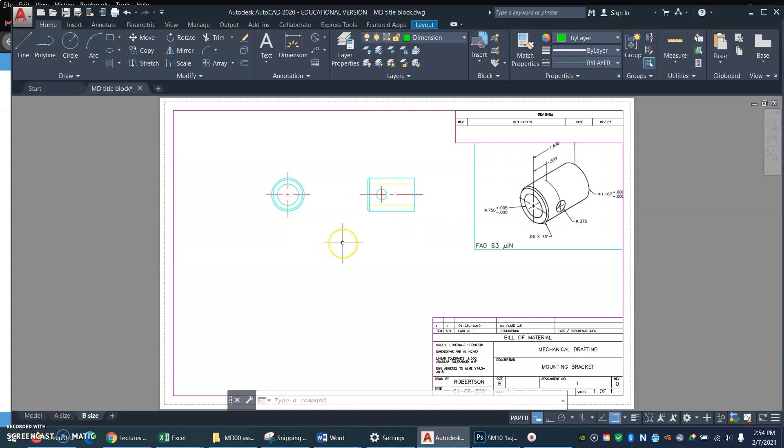This is a small part, as we mentioned, so let us try. Let me open the viewport. Right now it's at 1:1. Let us try a scale of 2:1 and see what happens. 2:1, and I'll pan. That does fit better, doesn't it? That looks pretty good.

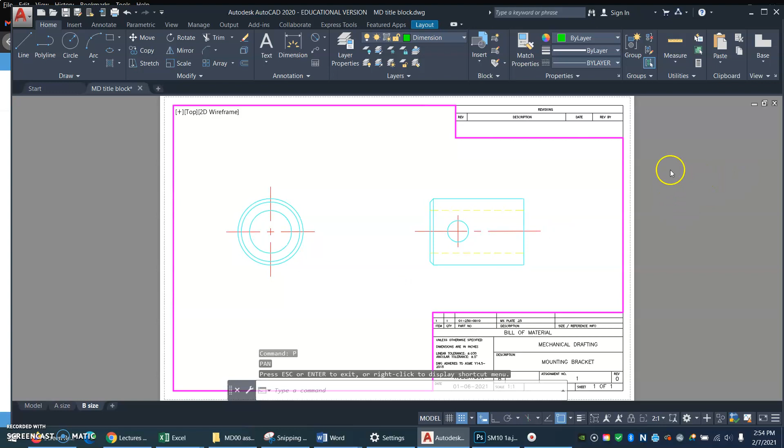The very next thing I'll do is double-click to close my viewport. Okay, my viewport scale is 2:1. That means my drawing scale factor needs to be 1/2.

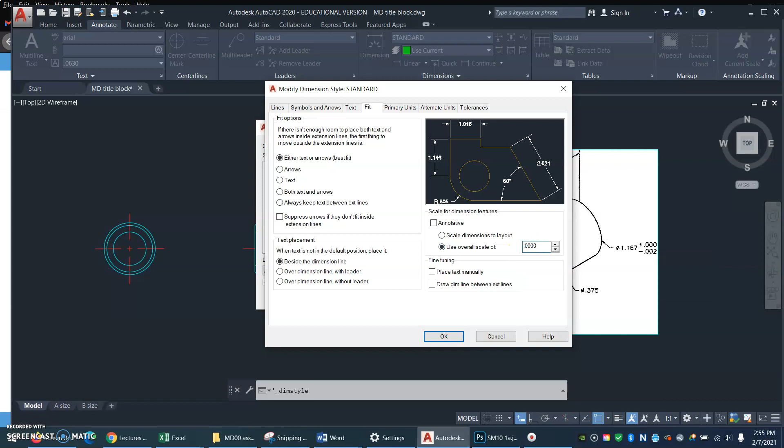So I'll go to the Annotate tab, Dimension Style, and I'll modify. I'll go to Fit, and under Scale, instead of a scale of 1, I'll have a scale of 1/2. Weird, huh? All right, so now,

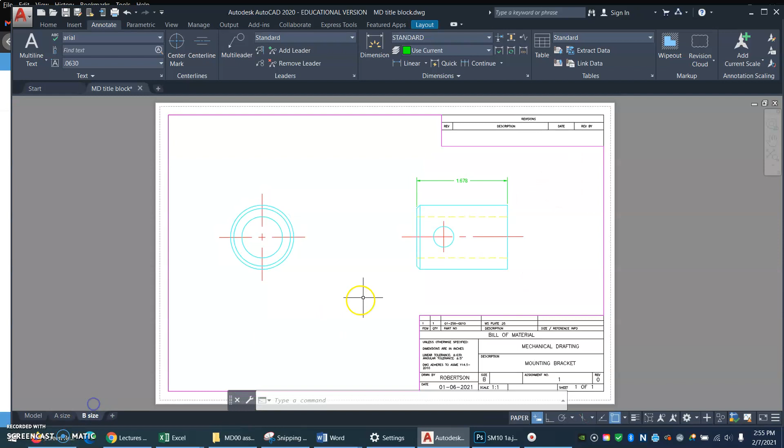Now my dimension should be okay. It looks tiny, but when I go to my 2:1 scale in paper space, it'll be just the right size. All right, so on and so forth, and I have another dimension here, don't I? Notice how I'm not clicking out in space, I'm clicking on the corner of the part that I'm interested in.

Okay, now I'm going to set a new dimension style for that 750 dimension plus 5 minus nothing. So I'm going to go to the dimension style, and I need a new style. I need to keep my standard, but I'm going to set a new style.

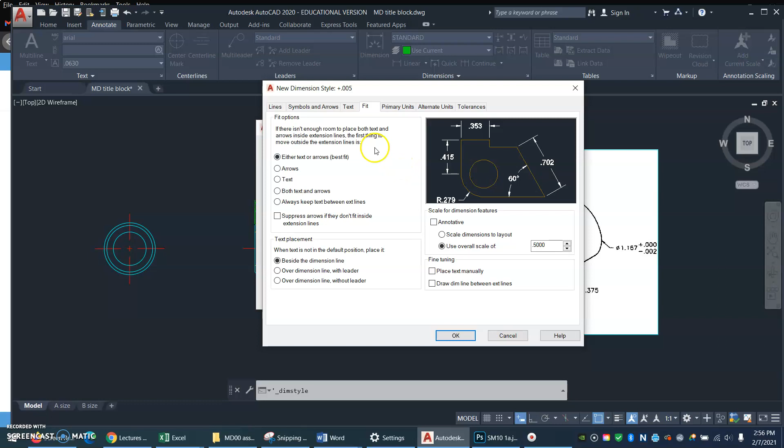I'm going to name this plus 005. I probably can't use special characters. Let's see if it allows it. Oh, it did. Okay. And now I'm going to go to the Tolerances tab.

And what method do I want? I want deviation. Watch the preview window change when I select it. See, now it's got deviation stuff. And for the upper value, I want 5 thousandths. I don't need to worry about those trailing zeros.

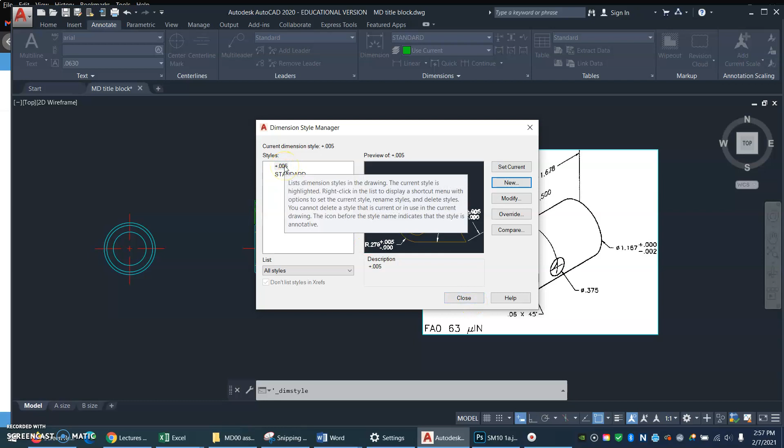It'll ignore them. So my upper value is 5 thousandths. My lower value is 0. And very important, I come down to the zero suppression area and I check leading. So suppress the leading 0. Okay. And I want to make sure that's my current style so I can put a dimension on.

Now, that is the tolerance on the inside diameter. I cannot put that in this view with the hidden lines, can I? Not allowed to dimension to hidden lines. So I'm going to put it in this circular view.

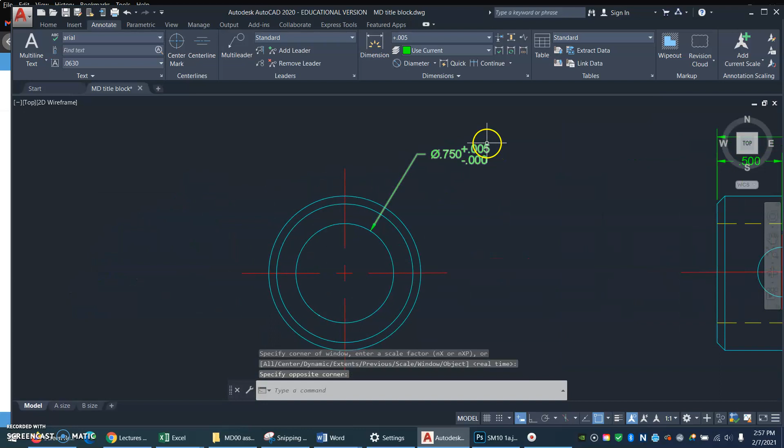I'll go get a diameter dimension, and I'll click on that inside thing, and looky there. There's my tolerance automatically put in, just like I want it.

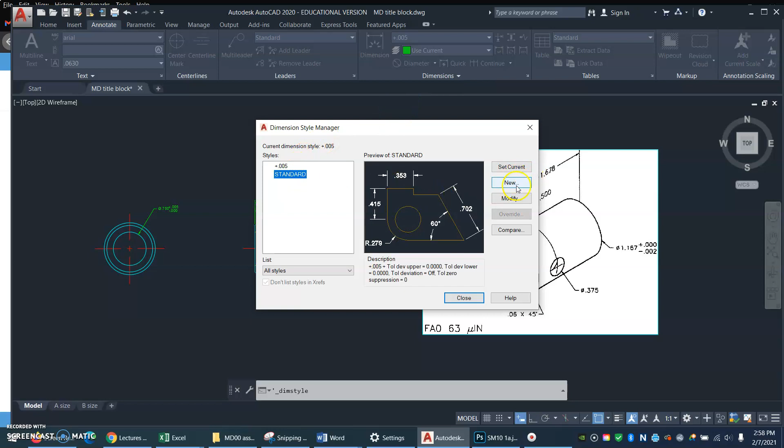Now I'll make another style for this outside diameter. It's plus nothing minus 2. Okay, so I'll start with one of the styles, it doesn't matter which one, and I'll make a new. I'm going to click new, and I'll call this minus 0.002.

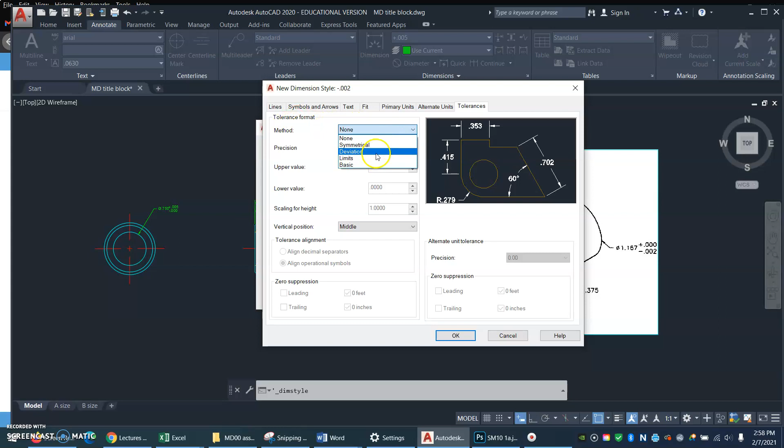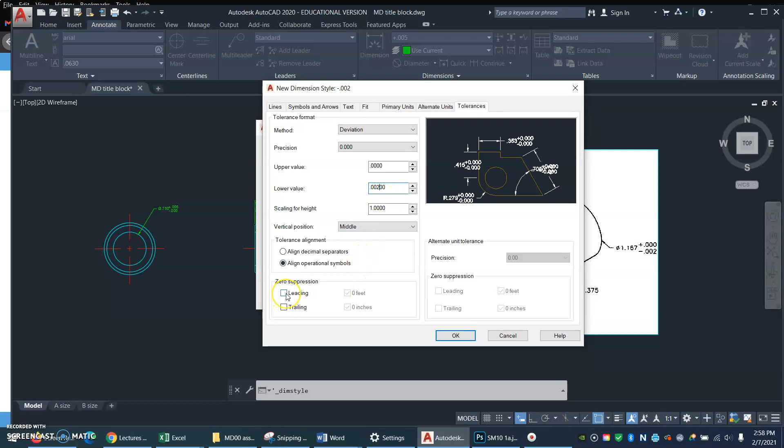Continue. And in the Tolerances tab, again, for the method, I will select Deviation. I'll leave the precision at 3 places. And this is plus nothing minus 2. So plus a bunch of zeros minus 002. And I want to make sure that I check Suppress Leading 0. OK. And that's my current style now.

Close. Now I'll put a dimension on this outside diameter. Oh yay! So look at this. I have 3 different styles. One is standard for these more plain looking ones. Here's the plus 5 and here's the minus 2. They're all different. Goody goody.

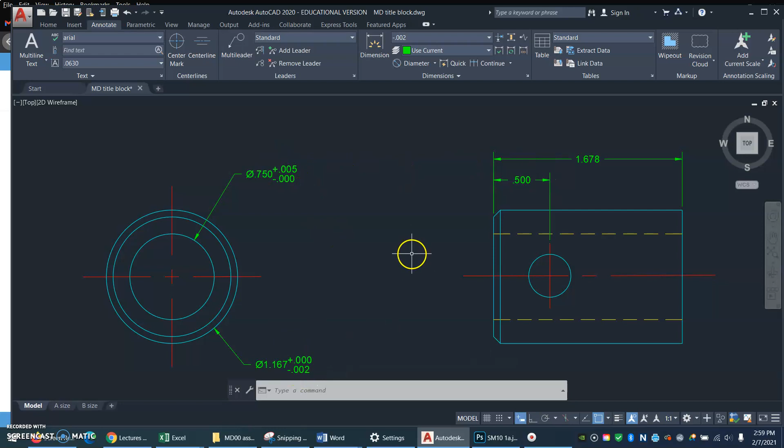What else do we want to do? Let us go to paper space. I'm not done yet. I need to do, okay, fine. I need to do 2 other things.

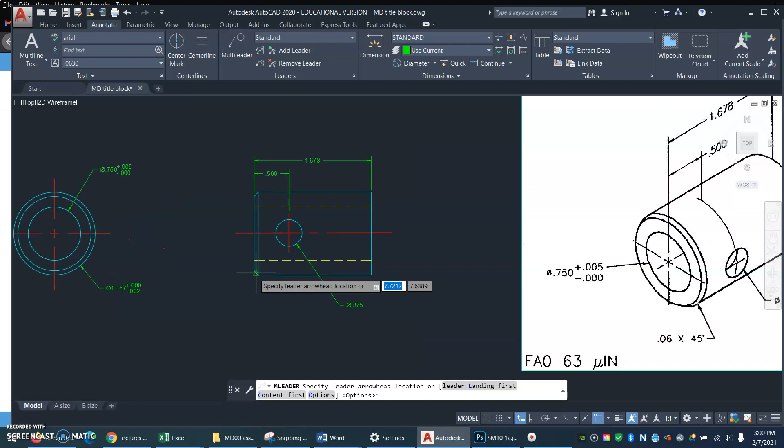I'll go back to my standard style, and I'll dimension this 3/8 hole, and I'll get a leader, multi-leader. I hope this works. And I'll click on my chamfer, and it won't work. You know why? I forgot to set my scale. See how giant that arrow is? Okay, so that won't work.

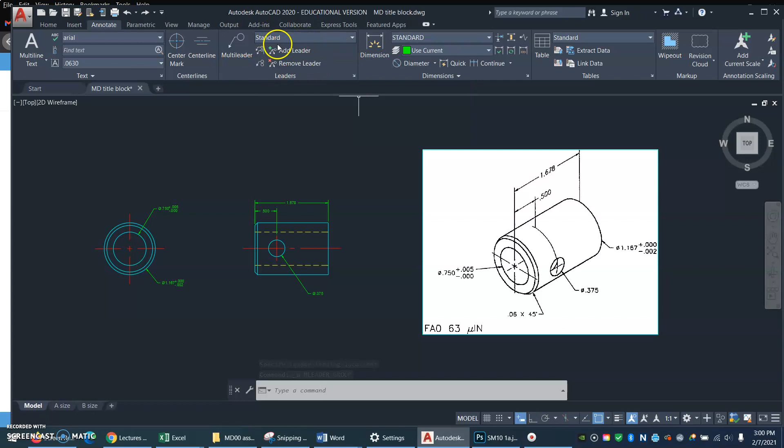I need to go to my leader style. Here it is. I'm in the Annotate tab, Leader panel. Click that down thing. That's the only leader I have, so I can just modify this one. And leader format is okay. Leader structure. Ha! Under the scale, I need my scale to be 0.5, just like my dimension scale is.

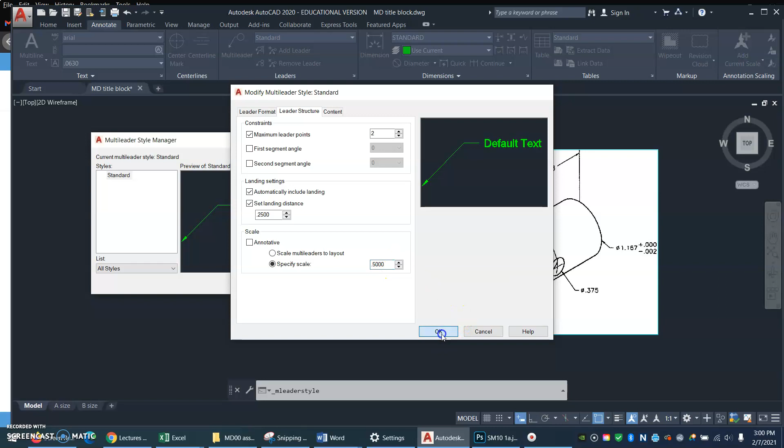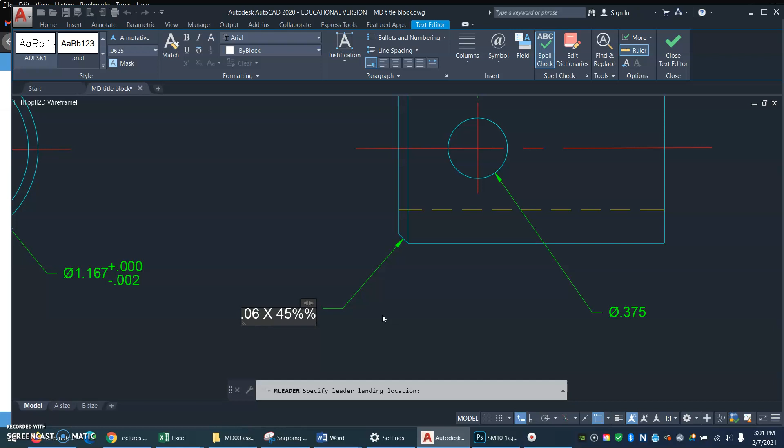Okay. Close. Now I will zoom in here and get a leader. I'll click on that surface of the chamfer. Yes, now it's the same size as the other stuff. 0.06 times 45. What's the shortcut for degrees? Percent D. Yay! Okay.

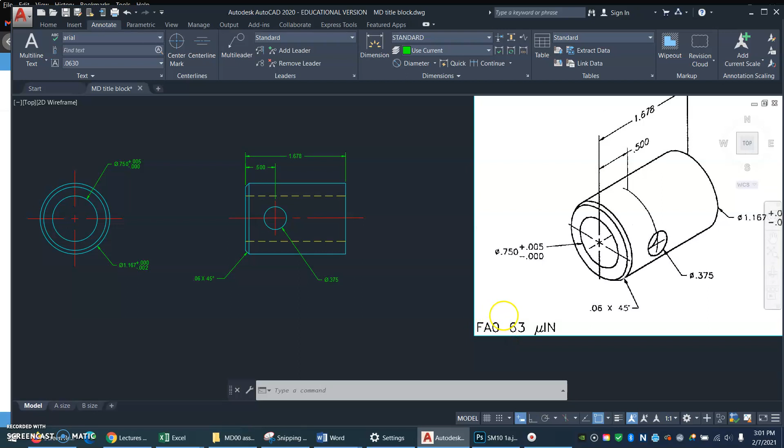So there's that. Now I'm going to go to paper space and get this finish all over thing in there. I could put it in model space, but then I'd have to figure out how tall to make the text. I think I'll just put a note in paper space. And so where are we? It's going to go down here. I'm in the dimension layer.

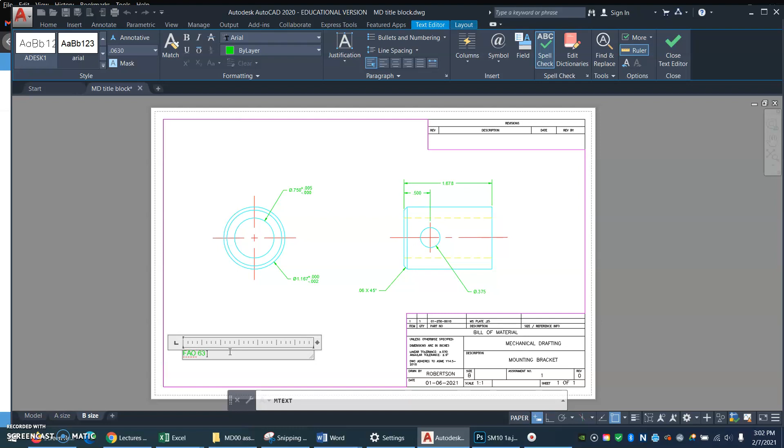Yes, that'll be good. And I'll get some MText and make my box for my MText. And I'll write FAO space. And now I'm going to write 63 micro inches. I think I will write the inches first, and then I will come back in and add the micro, just in case it changes anything. So where do I get that micro symbol?

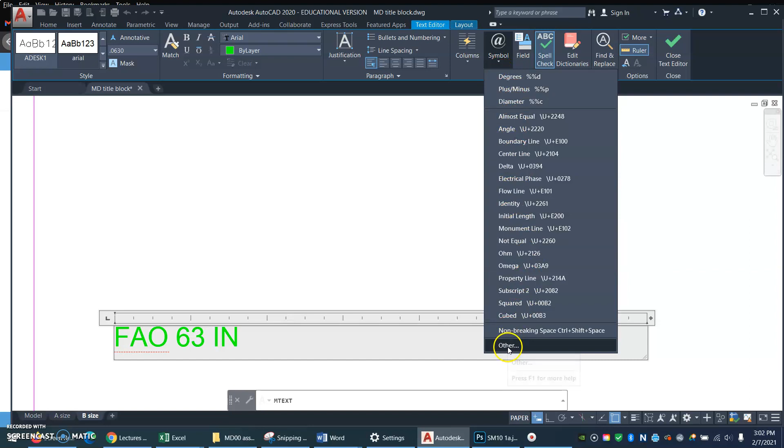Here we are, the MText editor is open, so I go to this symbol thing and drop it down to Other, and the font I am in is Arial. These things are hard to find. They put them way down here. We're looking for the Greek alphabet, and it's about a quarter of the way down. There are various other alphabets. Why they don't put the Greek closer to us, I don't know.

There are some Greek letters. You might recognize pi. We are looking for the lowercase mu, and there it is right there. It looks like a handwritten capital M that somebody squished sideways. It's got a little tail hanging down. So I'll click on that. That's the one I want, so I'll click Select.

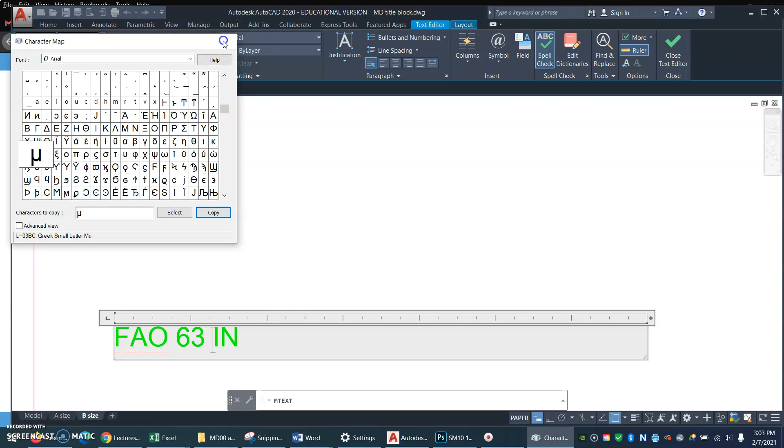And now I need to copy it to my clipboard, so I'll click Copy. And now I can close this thing. And here I can right-click and select Paste, or I can Control V, and it put a line break, so I'll do a backspace to get it back up there. All right, there is my text. It looks small, but that is 1/8 inch high text, I believe. Ooh, is it? I better check that.

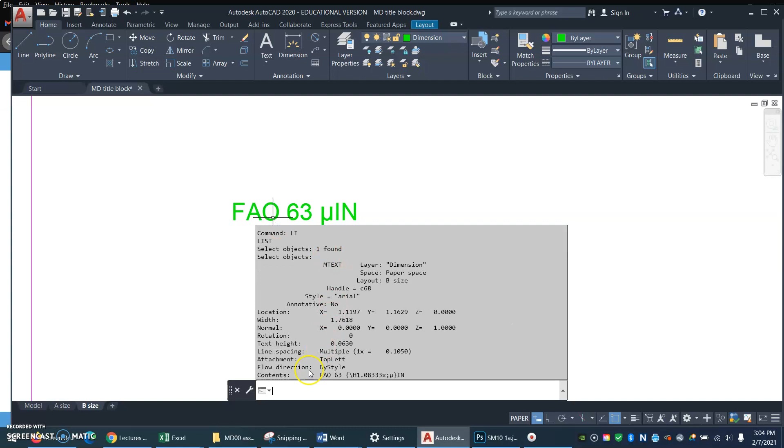I'm going to do a list command, LI for list, and I'll click on this thing, enter, and it says text height 1/16 of an inch. Well, that's not good. That should have been a text height of 1/8. I messed up. I forgot to enter the text height first. So what shall I do? I'll just scale this. Sometimes that's faster.

Select objects, yes I did. Base point, scale factor, I need to make this twice as big because it's 1/16 of an inch, it needs to be 1/8 of an inch. There, now that's the right size. Goody. What else is happening? Down here in my title block, let me go look at my bill of material.

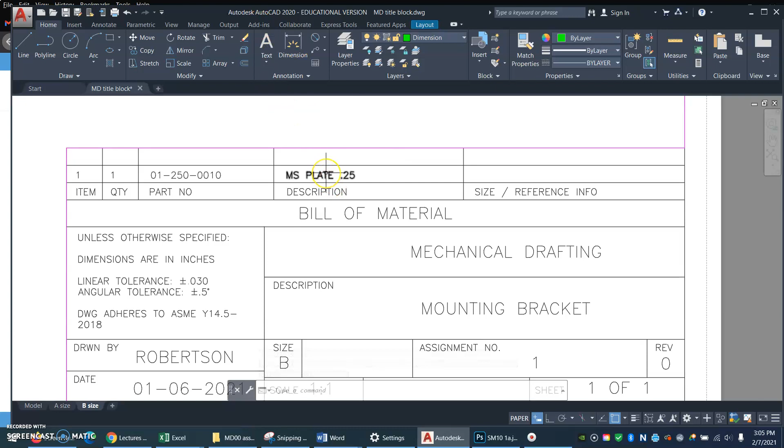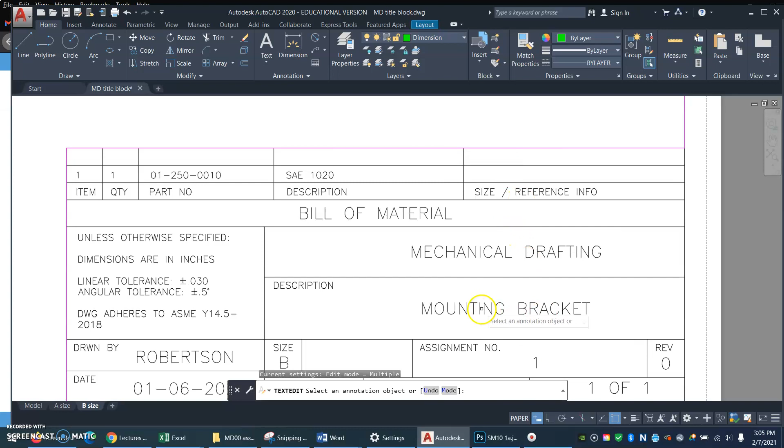This is going to be SAE 1020. So I'm going to leave the title of my bill of material here. This is the description that I need to change. So I will edit this text, and instead of mild steel plate, I will write SAE 1020. Okay, and now this is not a mounting bracket. This is a sleeve, and this is not assignment 1. This is assignment 15. Enter. And I am doing it today, so I'll change my date, and that's my name, so my name is good.

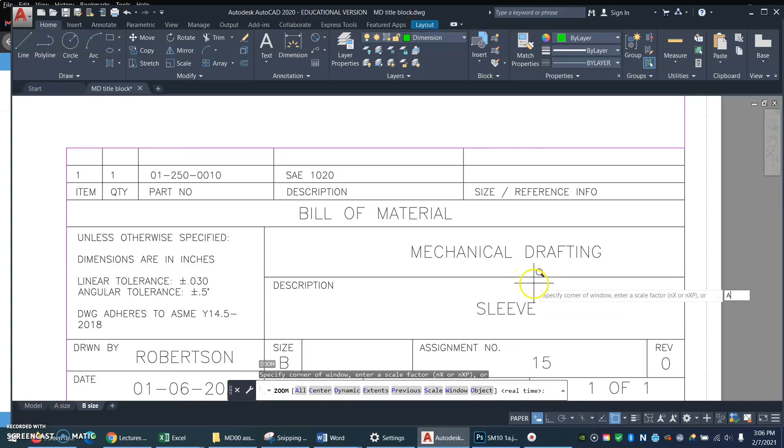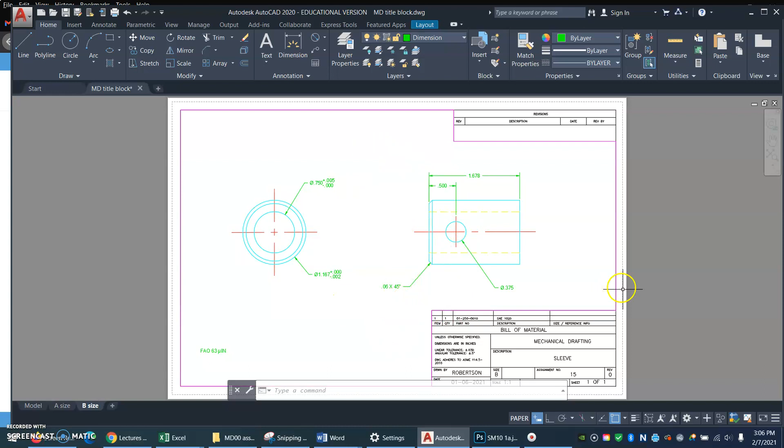All right, now we might be done. I think we are done. Did I forget anything? Probably not. Oh, goody. Okay, there's my drawing. And I fit it into my viewport at a... Oh, yes! I did miss one thing. My viewport scale is 2:1, isn't it? Double click and close that again. That means in my title block, I need to change the scale to 2:1. There we go. Okay, now I'll change the date and name and I'll be good.